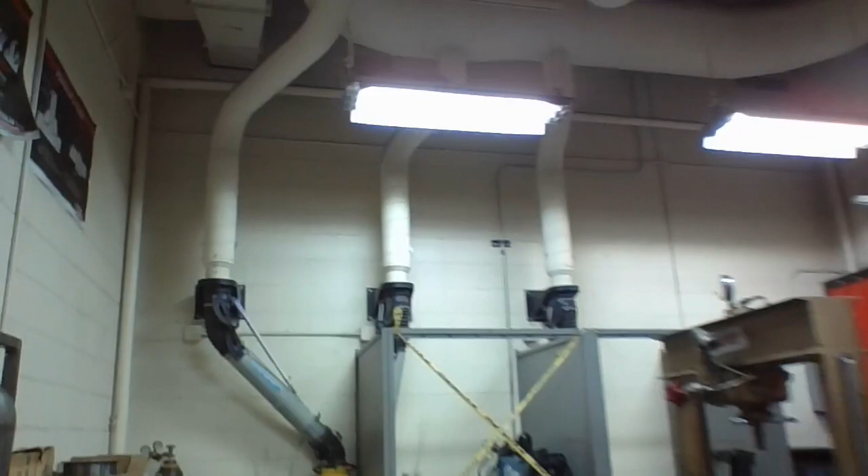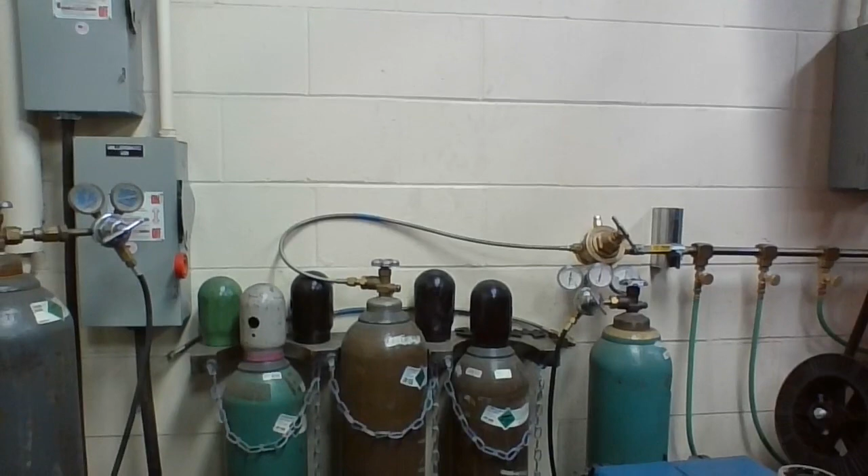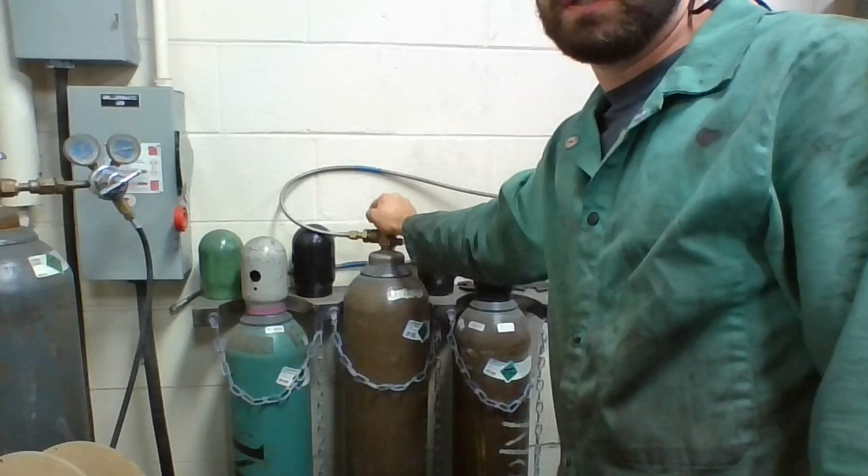So the typical gas pressure you want to use when MIG welding inside without any wind or anything is roughly between 15 and 20 CFH, so cubic feet per hour of flow of gas. To do that, I'm going to pick you guys up and flip you around in our welding shop here. If you walk into the shop and come over right in here, we have 3 tanks with a regulator on it right here. It's not a flow meter. This is a regulator. It regulates how much gas is going through there. So the best way to set this is slowly open the tank. Go ahead and open it all the way.

So what I find is the easiest way to set your gases is to come over to the machine here and turn on the machine. And then on the back side of our wire feeder suitcase, there's also an on-off switch, and I believe down turns the switch on, up turns it off. And then on the front of the machine right here, there's 2 little toggle switches. The one on the left is the trigger hold, so we're never going to use that one. But the one on the right is a wire feed. So if you push it up, if you see this right here, it's going to jog my wire out.

If I push it down, if you listen, it'll purge the gas into the system. So I think that's a good thing to do every time before you start welding for the first time for that day, because it purges all the air out of the system. And rather than getting porosity for the first inch, you'll have some 75-25 argon CO2, like what you want.

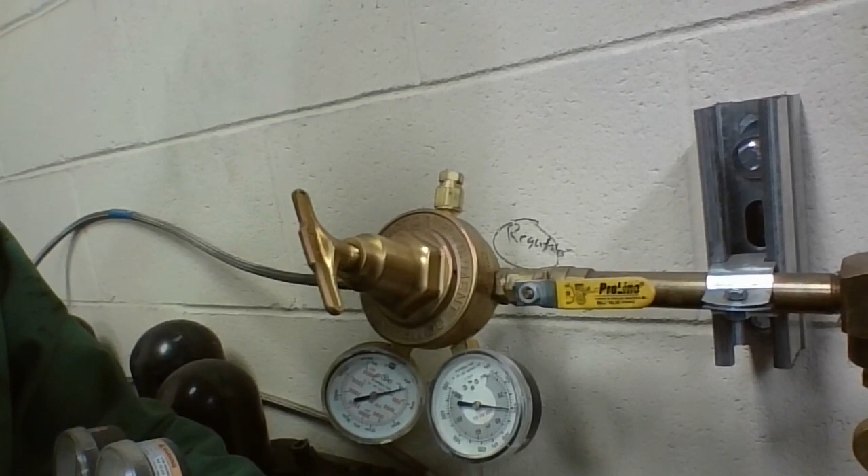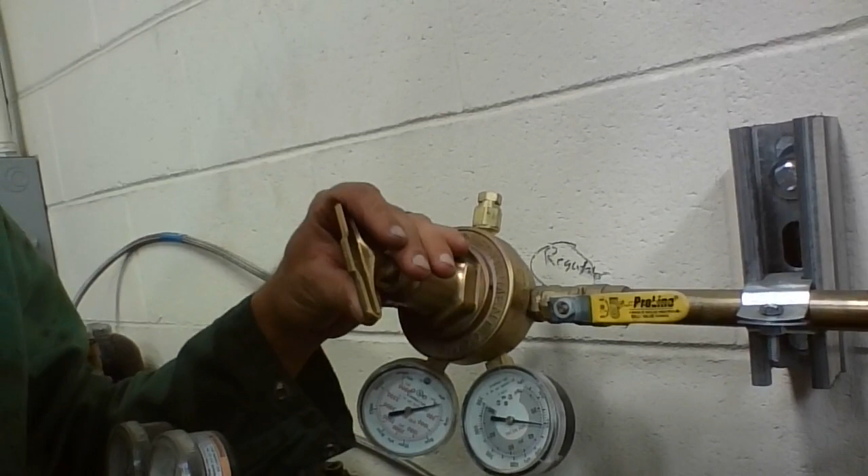So looking at the regulator on the wall here, right now I've cranked this up so it's at 200 psi, which is way, way too much for what we're doing. So I'm going to back out the T handle on here, and I would always check this at the beginning of the day. And where you want the pressure to be at is the second black line up. And to get this pressure to drop, I'm going to go back over to my welder. I'm going to push that purge button for a minute, let it purge the gas out of the system, and then I'll come back over here and double check it.

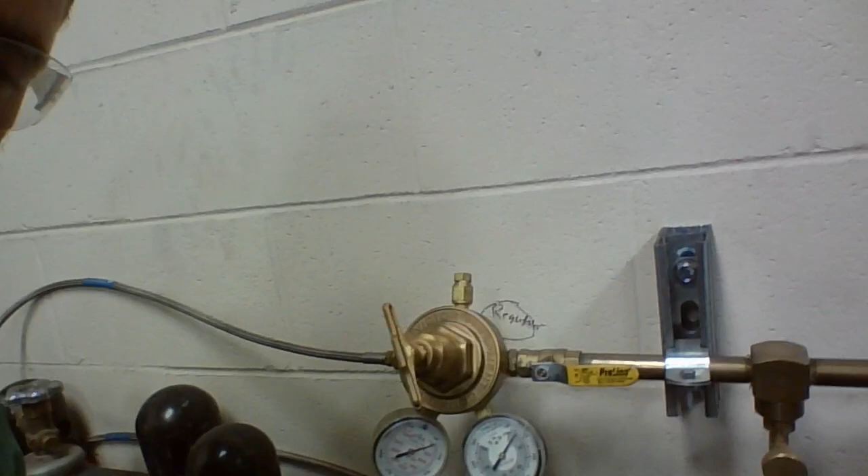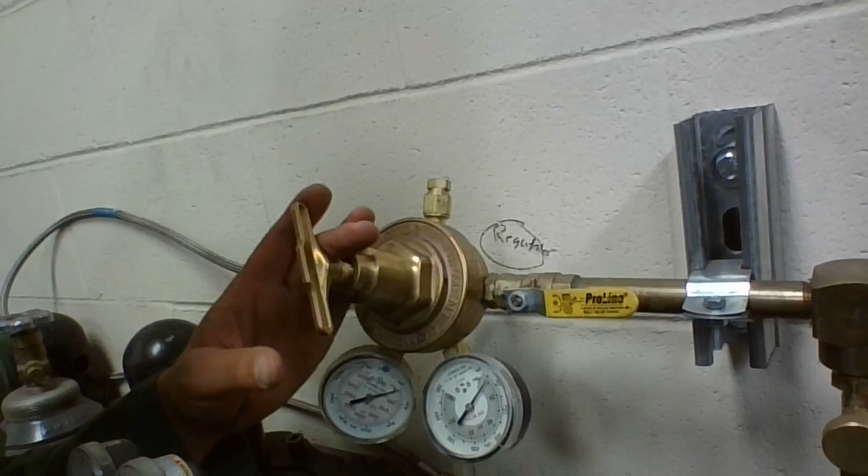Now with the purge button pressed, I have it adjusted to my second black line right here. And you want to push the purge button as you adjust this, because that's going to be your working pressure. So if you just adjust this, it's going to drop from there when you start actually using the gas.

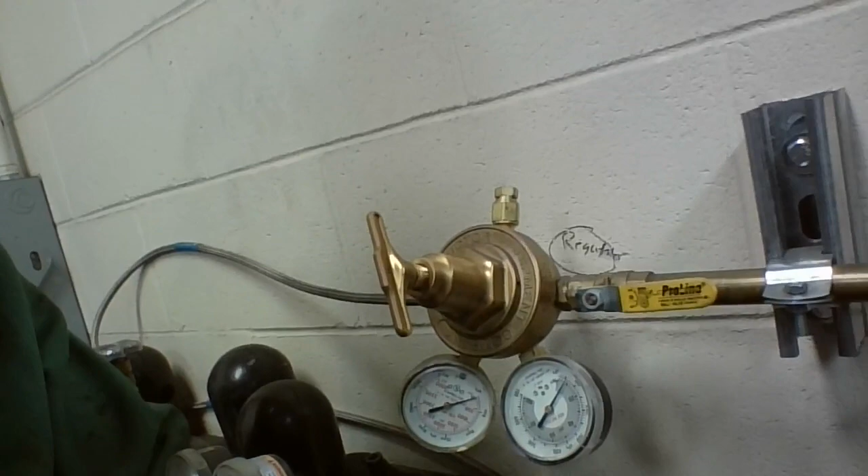So now that we have our gas set, we need to know what we can weld with the MIG welder. With the right setup, a MIG welder is a pretty flexible piece of equipment. The way ours are set up right now, you can weld steel, and that's it, mild steel. But you can buy a spool gun for your machine, and that allows you to weld aluminum. And you can also change out the wire on just a regular welder without the spool gun, and put stainless wire in there if you want to weld stainless steel.

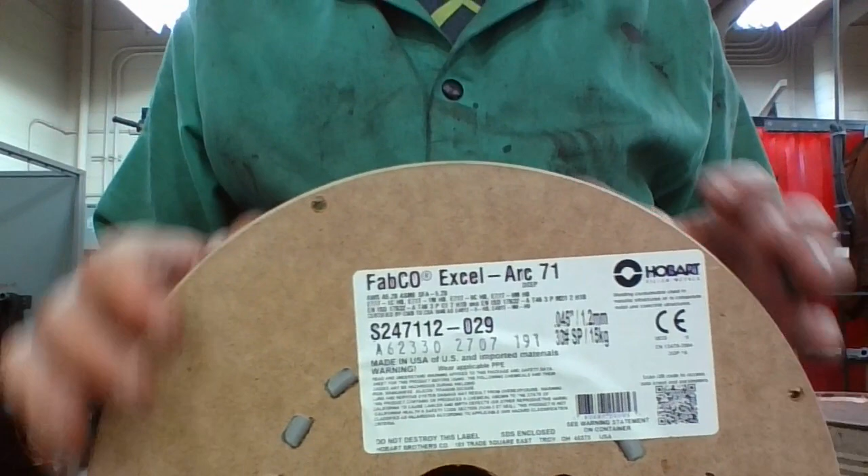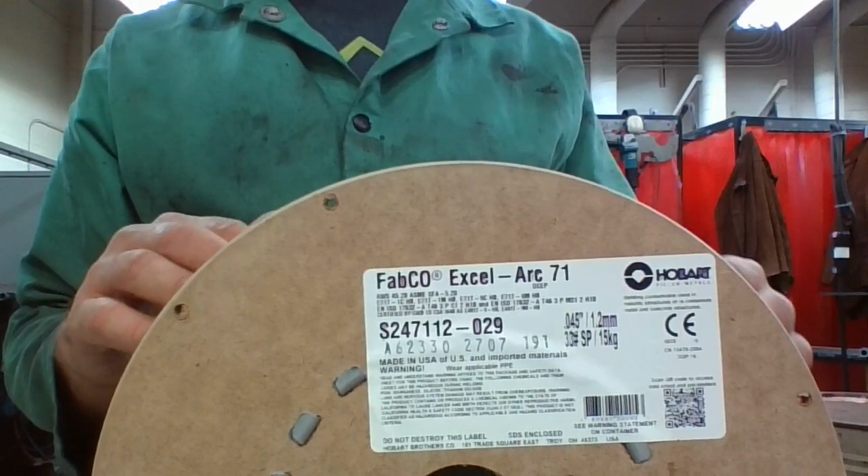As we're talking about steel wire that you can use on a MIG welder, there's 2 main different types that you can use. So I'm going to zoom you down here. The first one is called dual shield. If you look right here, that says 0.045. So that tells you the diameter of the wire. So typically dual shield is 0.045. And I also write on these 0.045 dual shield, so it's easy to tell.

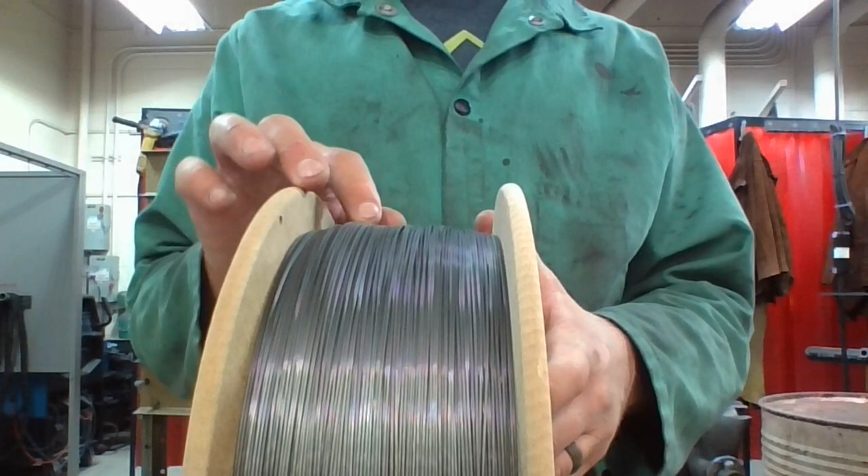And if you look at it this way, you see how silver that is? All dual shield will have a silver coating on it like that. And what dual shield is, it has a shielding gas on the inside of the wire, and when that burns, you're getting the shielding from that, and you're also getting the shielding from the C25, the 25% CO2, 75% argon that's shielding it as well. Whereas a regular MIG wire will have a copper color to it like this.

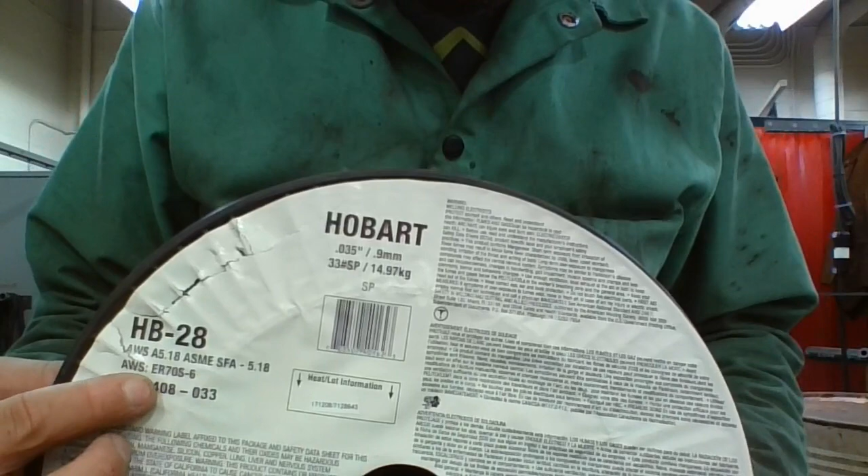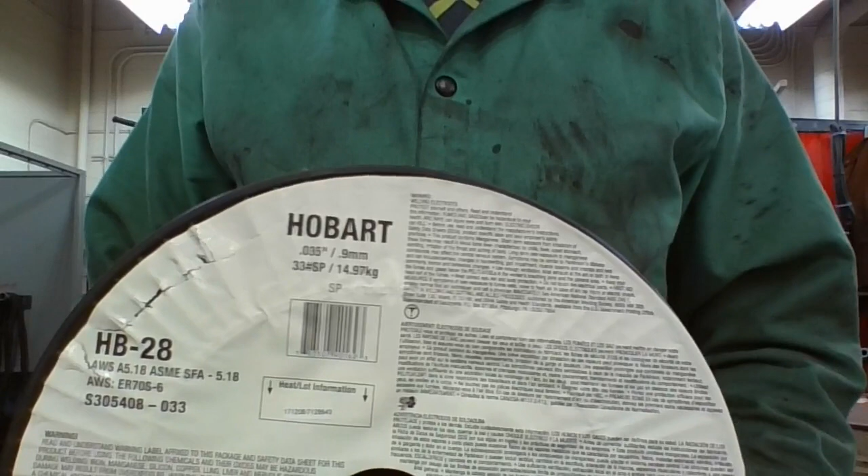And if you look at the label on here, it's going to say right here, ER70S-6. This is about the most common MIG wire you can find. It's also going to tell you the diameter of the wire right at the top here, 0.035. So this is 035 ER70S-6.

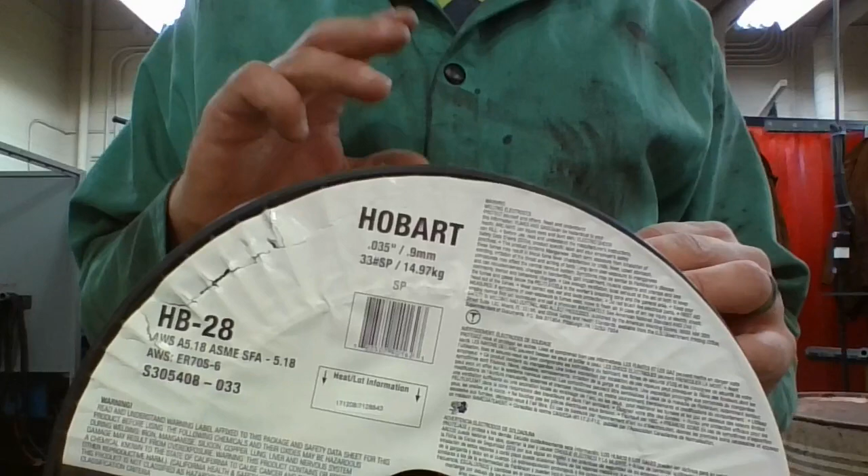And the three common ER70S-6 wires are 0.023 or 0.024, 0.030, and 0.035. 0.030 is a very common well-rounded wire that can be used from any thickness. So it'll go down to about sheet metal thickness, and it'll go up to about 5/16.

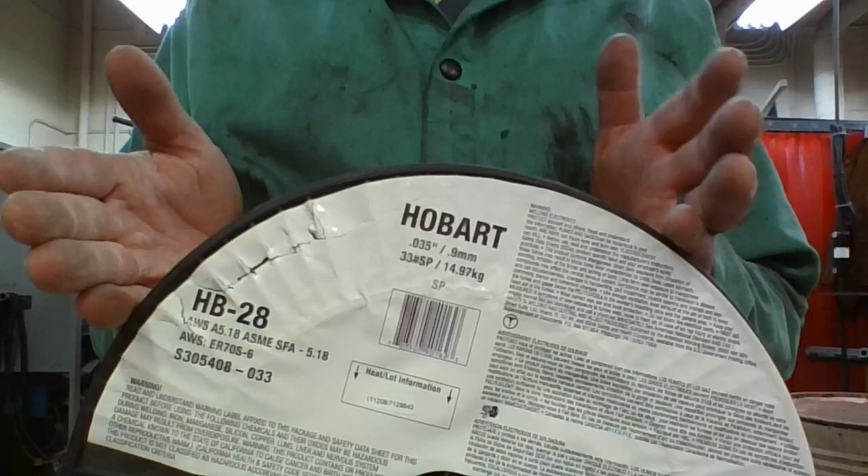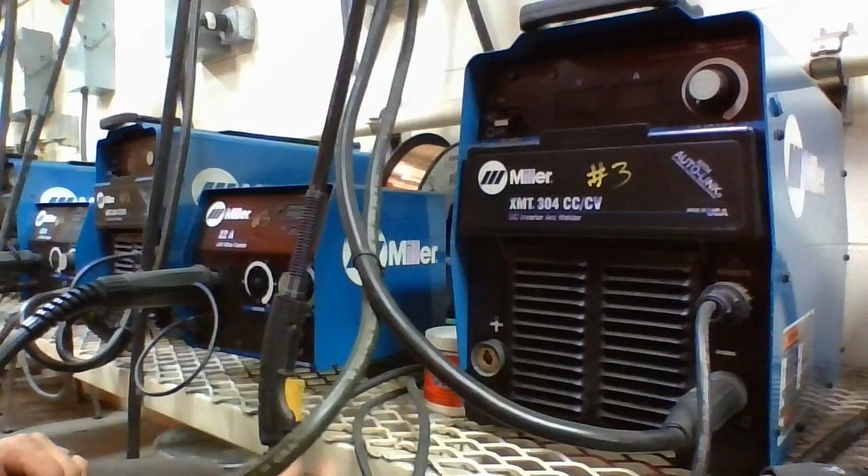Now we're back over at the machine here. And one thing we need to make sure is that our machine number matches our wire suitcase feed number. So both these are 3. The next thing we're going to do to set this machine up is we are going to take the electrode holder out of the positive, make sure our ground is in the negative position,

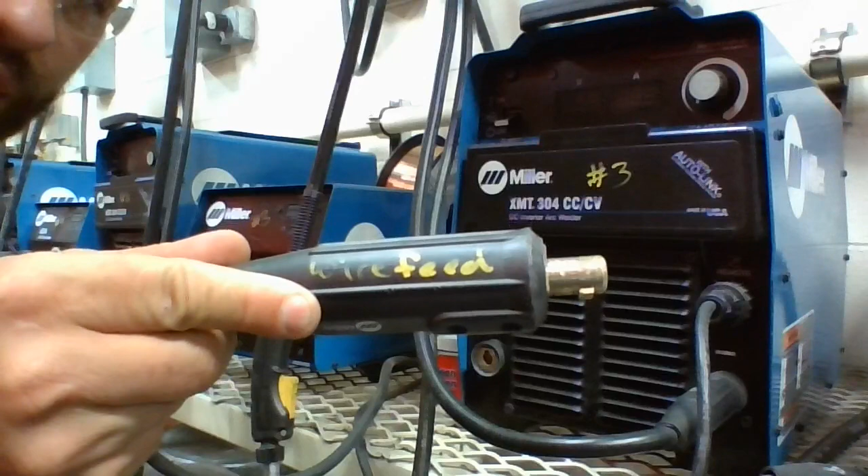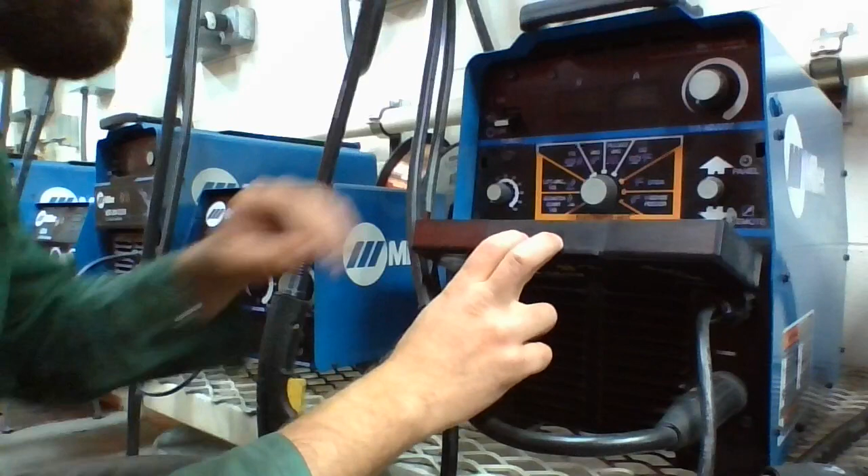and then right next to the machine here, there should be a Dinse plug that says wire feed on it. And make sure that wire feed goes to the suitcase that you think it does. You're just going to plug that in, twist it, get it nice and snug. We're going to flip the front cover open here. We're going to switch it from stick to MIG.

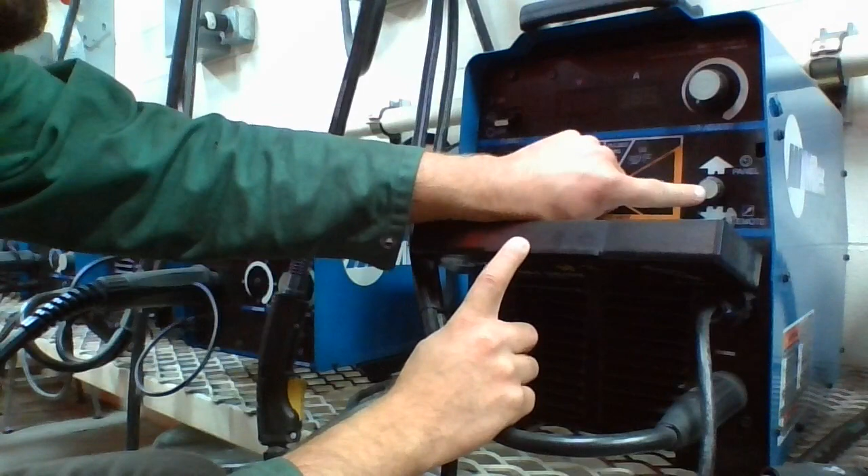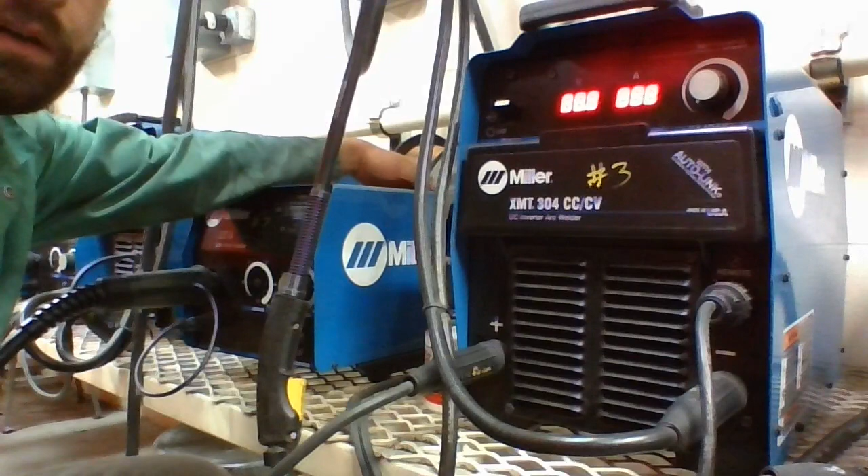Turn the arc control to 0. Turn the VA control up to panel. We'll go ahead and shut that. You can flip the machine on. On the back side of the suitcase here for your wire feeder, there's a switch. Flip that down. That turns the suitcase on. And then your gun, when you pull the trigger, it should feed wire and purge gas.

A couple last things that I like to do before I start is I like to unscrew my nozzle, and you'll see the nozzle and the tip will come out together. So if you take a pair of welding pliers, some people call these welding helpers, you can push on the tip. You might have to spin it around a little bit, see if you can get that out of there. So there, we got it out.

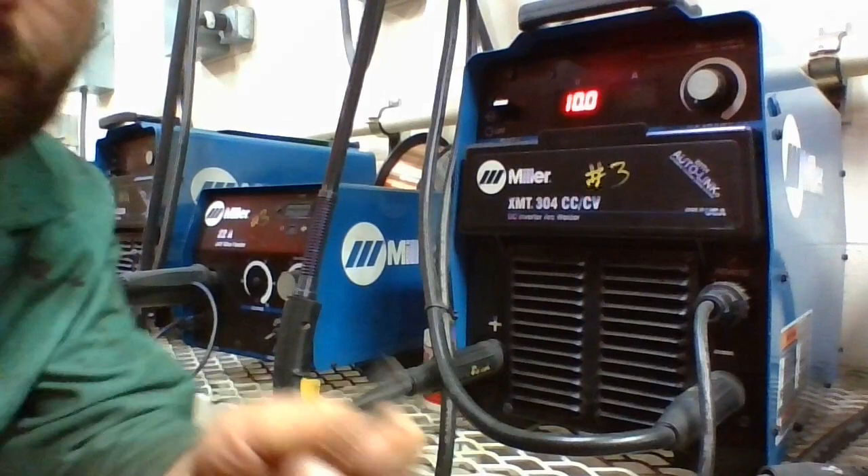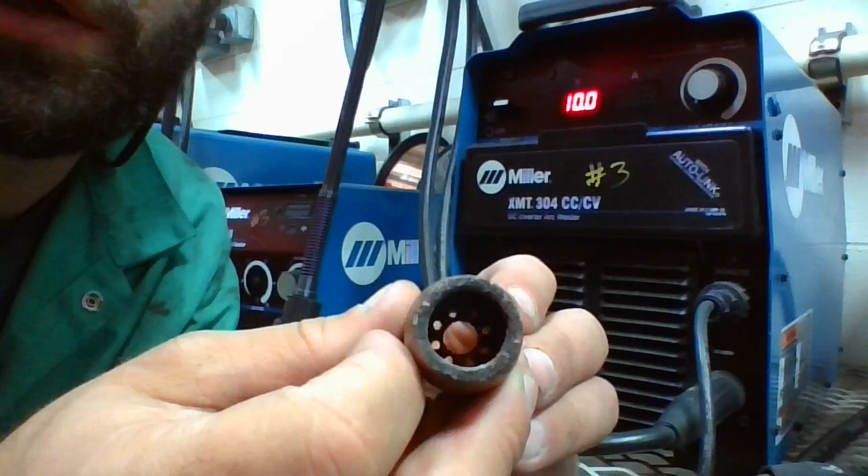This is what your tip looks like. And this one's pretty used up, so I'm going to grab a new tip. And then also the other thing I like to check is on my nozzle. You see all those holes in the back of there? You want all those holes to be clear, and you don't want any spatter inside of here.

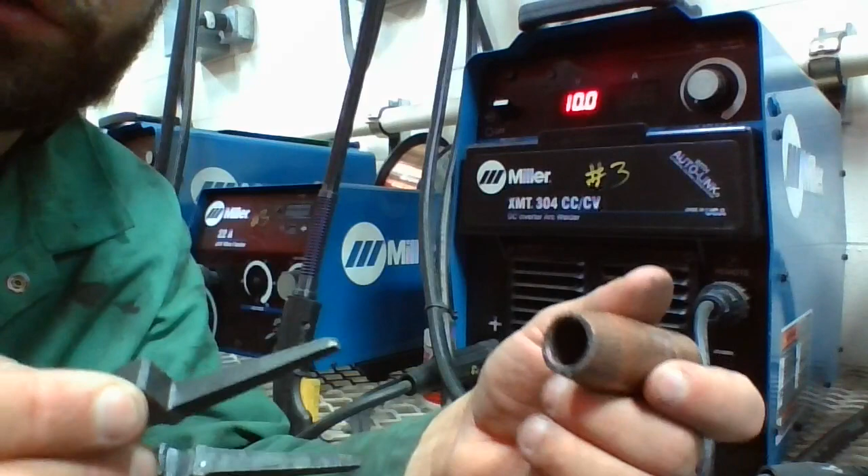If you have spatter, just take your welpers and put them inside the nozzle like that and give it a spin. I'll also sometimes close my welpers and then open them like that and spin it like that and get all that stuff out of there, because any debris in there is going to prevent the gas from flowing like it's supposed to.

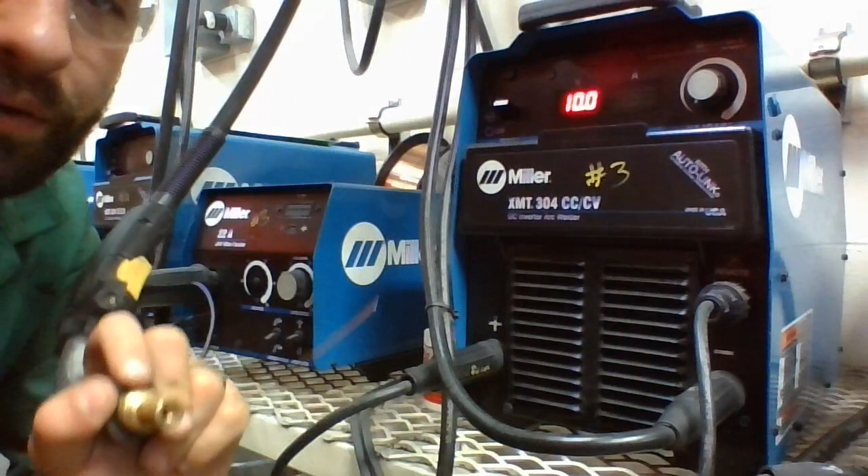Then once you're done, go ahead and install the nozzle and the tip back on the MIG gun. Be really, really careful not to cross thread the nozzle onto the gun. So here I have my brand new tip. All that I'm going to do is take my wire, slide the tip onto the wire like that until it comes all the way down.

And then when you put the nozzle on, you have to be careful that your wire doesn't go through one of those holes that we just cleaned out. Then you just thread it on. And that doesn't need to be super tight, just snug. And then we have all this extra wire coming out of our gun. And if you look at these welpers, on one side the wire cutters sit flush, and on the other side they kind of sit in a little bit.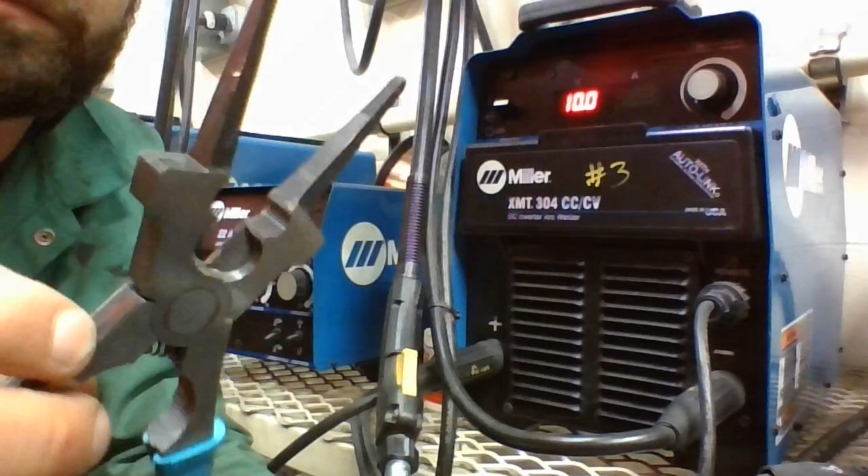So if you take this side of the pliers, set that down on your nozzle, just like that, and then cut your wire off. That'll set your wire stick out distance. That's the distance that you want to use.

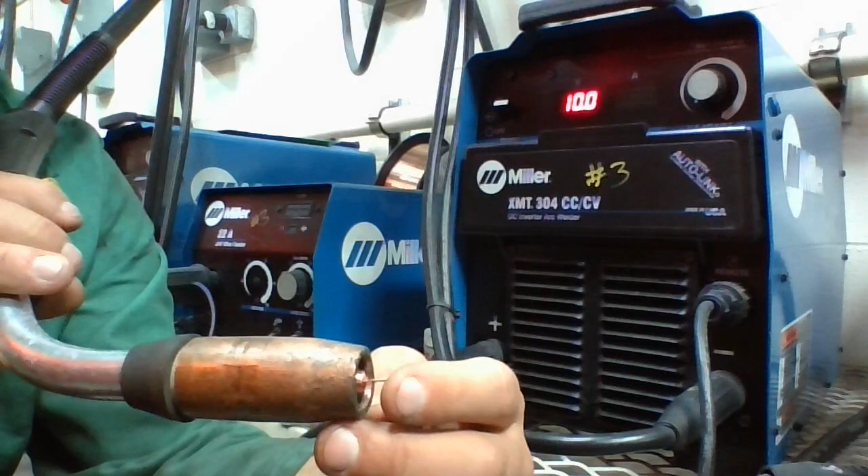Also, after you've been welding for a little bit, you let off the trigger, you're going to have a little ball that builds up on the end of this. You should take your welpers every time you let off the trigger and trim that wire. That'll make your arc start a lot easier and run a lot smoother for those first couple seconds where it'll usually kind of sputter.

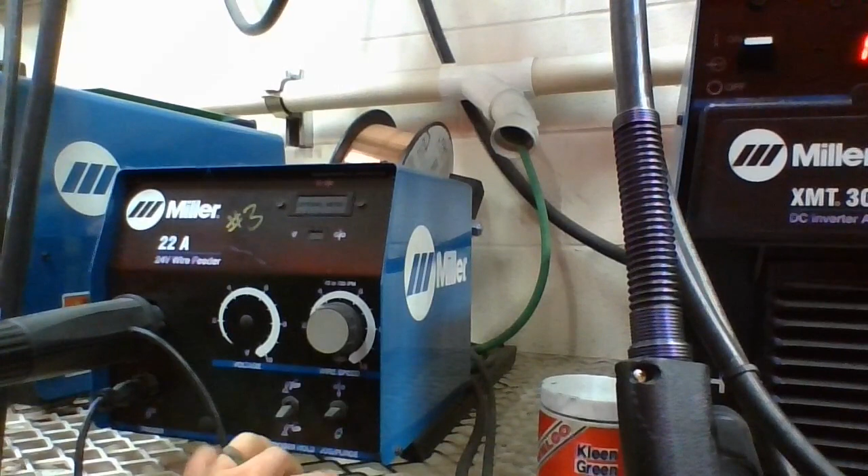Now that I have my tip cleaned and my nozzle cleaned out, what I'm going to do before I start welding is come over to the two switches on the front of the machine right here. This right switch says jog/purge. If I push the switch up, it'll jog the drive wheels and push some wire out. If I push it down, it'll purge. So I'm going to push this lever down for about 5 seconds. 1, 2, 3, 4, 5.

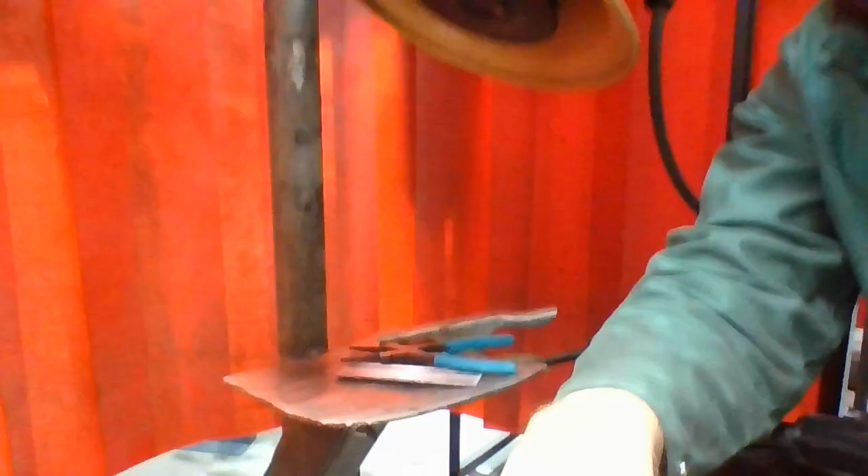What that does is purge all the gas from the atmosphere out of this line that may have got in there as it was just sitting, because the gas will naturally flow out. So we flipped ourselves around here. I have my ventilation over my head, just like we did when we were stick welding, because I don't want to breathe all the stuff that's coming off of this, all the gas and stuff.

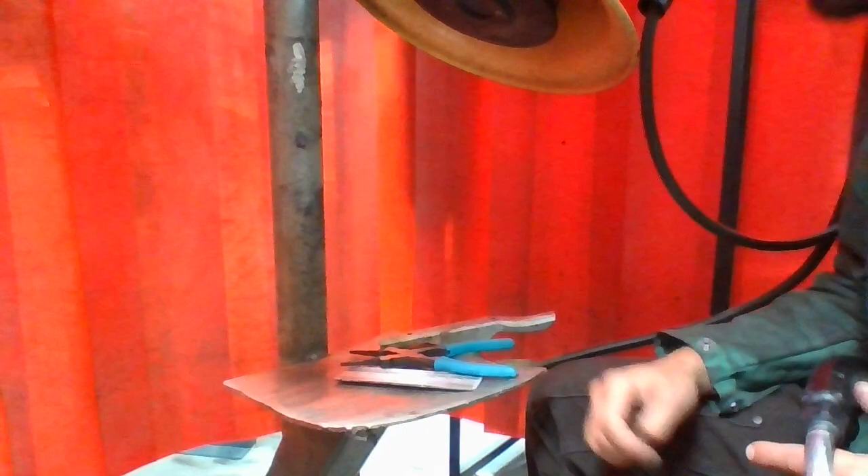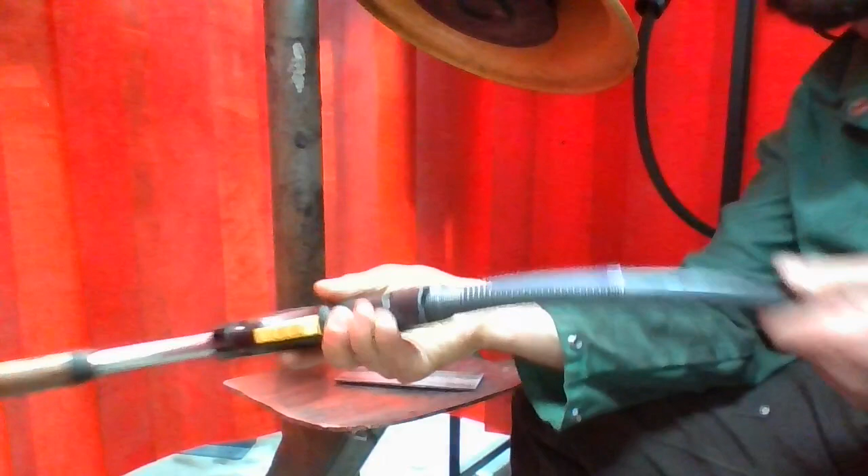One thing to keep in mind before you start welding: your MIG welder has a lead, and inside of this lead there's a liner. In order for the wire to flow out to the end of your MIG gun, this lead can't have any tight bends in it. So if you look behind yourself and your MIG lead has any tight bends, put a big loop in there rather than a small tight bend. That'll make it feed a lot smoother.

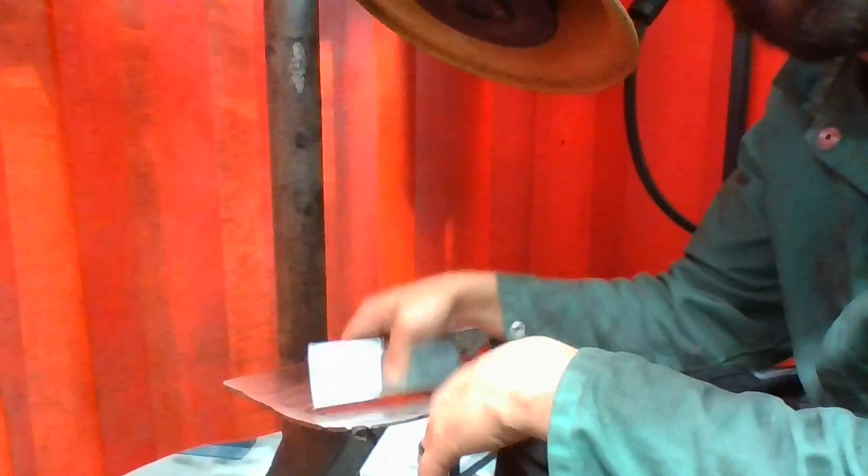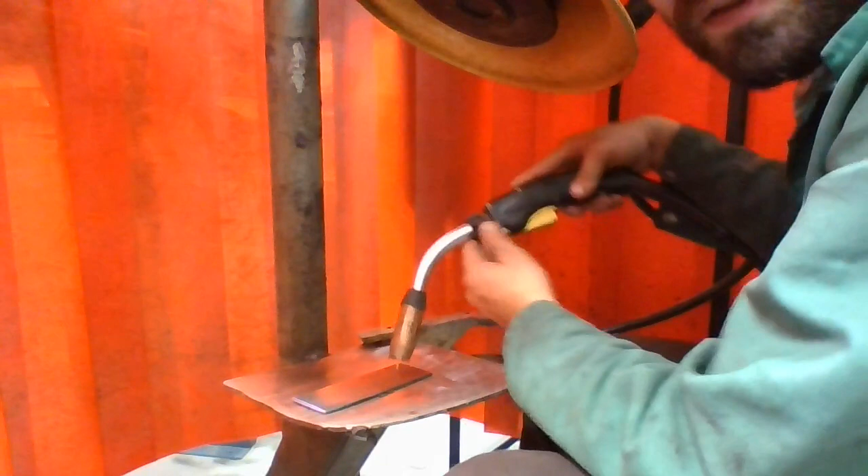I've got my material, it might be kind of hard to see, polished up nice and shiny bright. That way I'm not trying to weld through mill scale. I've got my ground clamp hooked up to my table, on the back so it's tucked out of the way. Now I've got to decide what welding motion I want to use and also what angle I want to weld at. When I'm welding flat, I try and keep my torch at 90 degrees side to side, and then I rock it back roughly about 30 degrees or so, and I keep that consistent as I'm moving.

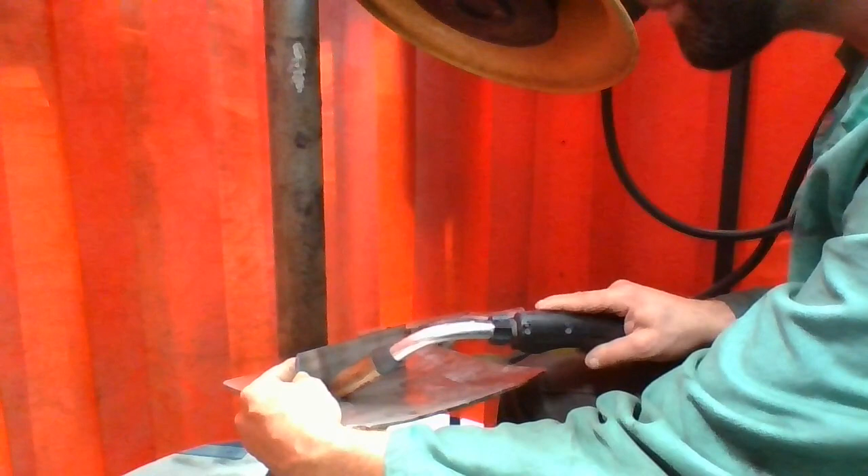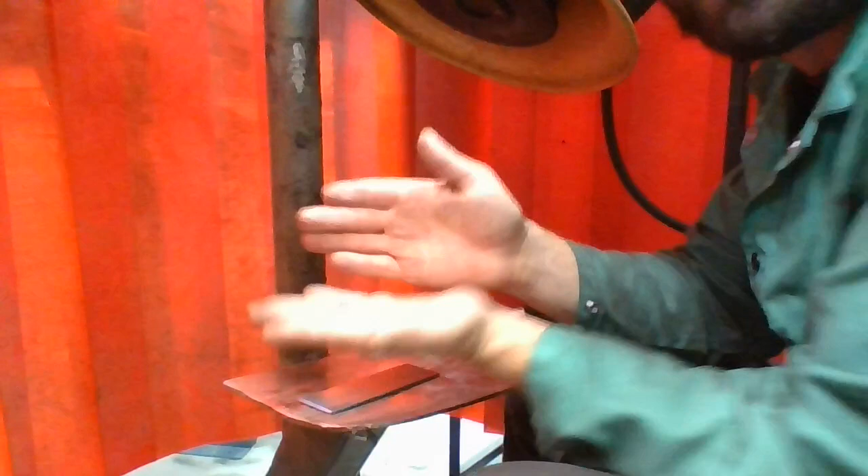That's going to change if I were doing this as a T-weld. I'm going to aim my gun straight into the corner of the joint with a 30-degree back angle. So typically, the rule of thumb when you're welding flat with two joints like this is to aim perfectly square into the corner with a 30-degree drag or push angle. If you're doing a lap weld, same thing. You're going to aim into the corner of the weld.

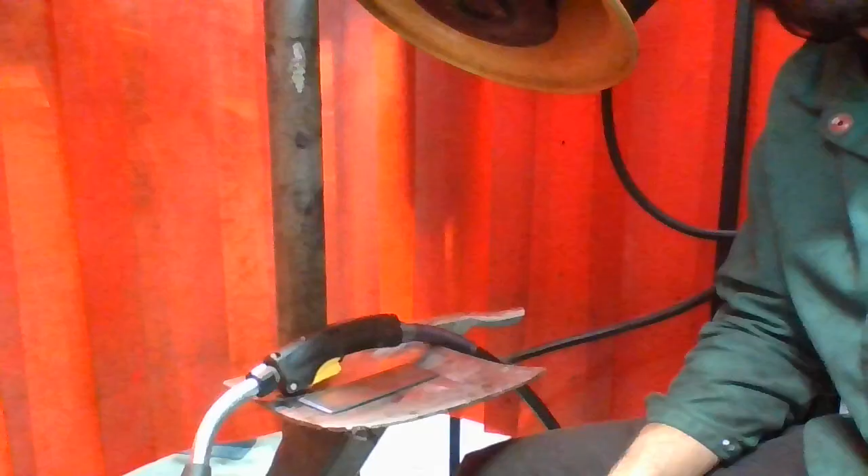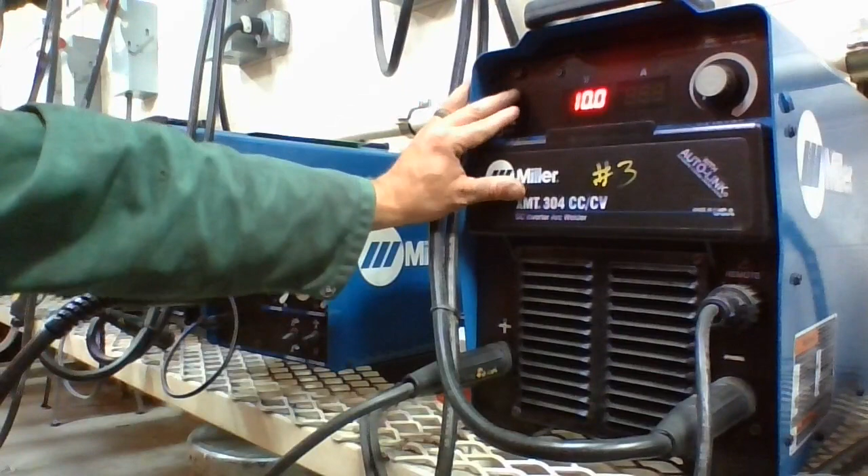I'm going to take you over to the whiteboard and draw some of the oscillations that work really well for MIG welding. But first, I'll show you how to shut everything down. When you're done with your machine, make sure to turn off the welder, and on the back side of the wire feeder, flip that switch up so the suitcase is turned off also. The last thing is to shut our gas off. We come to the cylinder attached to the braided line that goes to our regulator, and we shut that cylinder just like that.

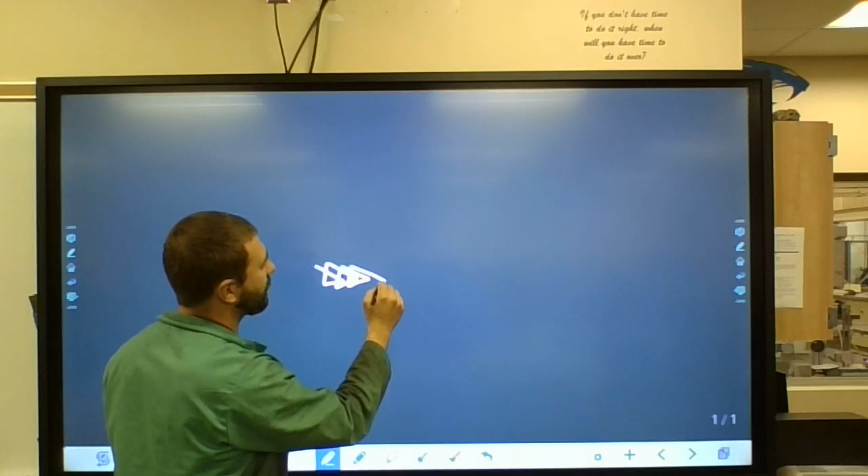There are basically three different types of manipulations for the MIG welder that work really well. You want to try and trace the front of the puddle. You never want to go out of the puddle, but the further forward you can get in the puddle, the better. That helps with penetration. The first manipulation is a series of triangles. As you go forward, that gets you to the front of the puddle. When you come back, that allows you to add more material. So that's the first one.

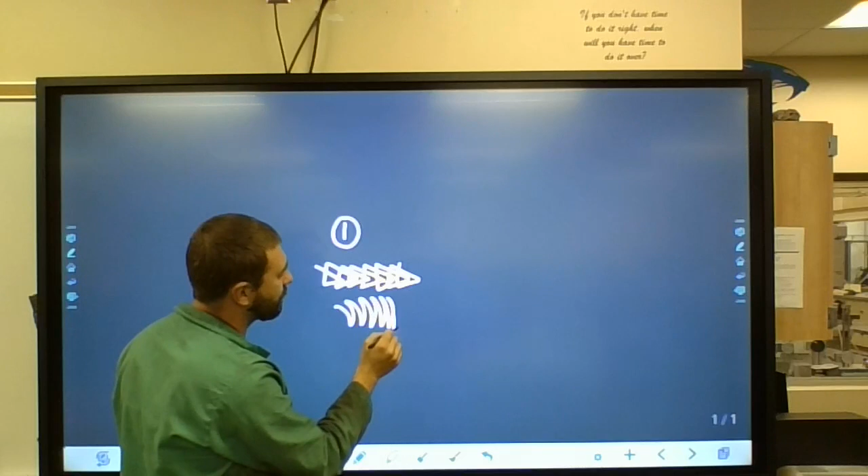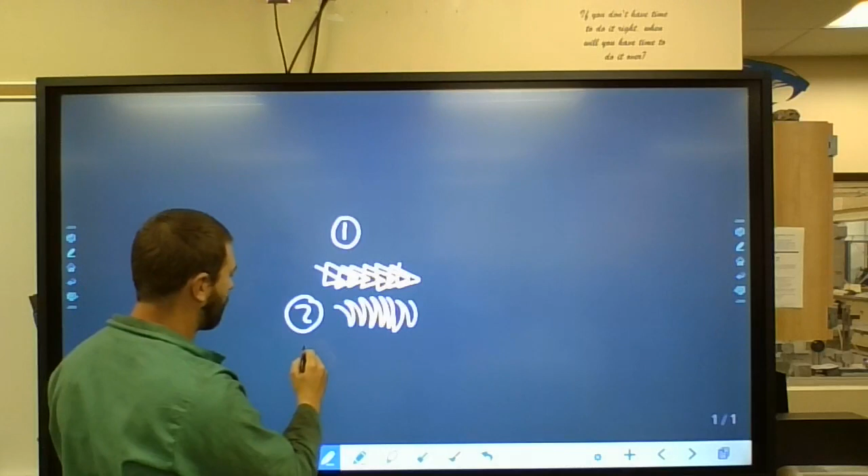The second one that works pretty well is a series of C's or half moons. It looks something like this. I'm pausing on the edges of the weld here. That's number 2. The third one is the one I use most often, a bunch of almost like cursive E's. So we have an E and another E.

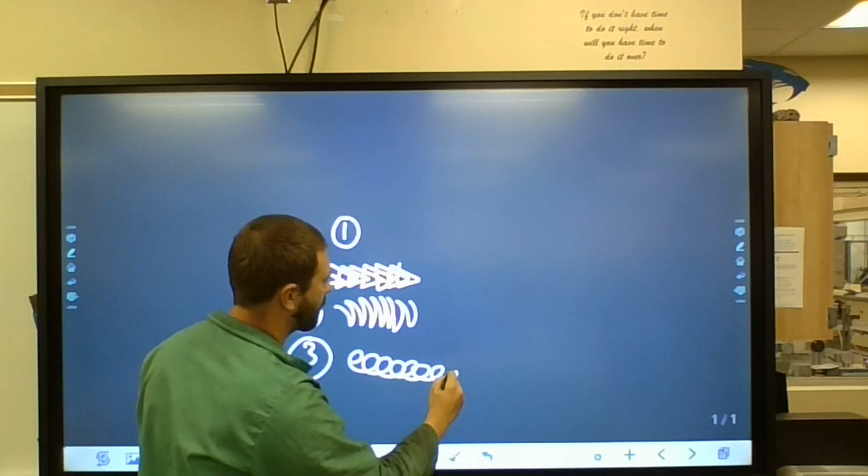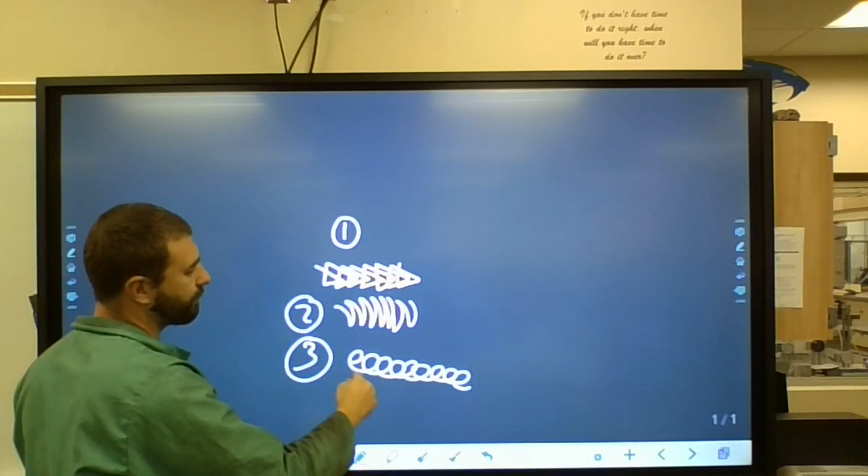I like that one the most because with some of these I feel like I get kind of jerky and not very steady, whereas that one is one fluid motion all the way down your plate. So experiment with all three of these and see what works best for you, because what works for me might not work very well for you.

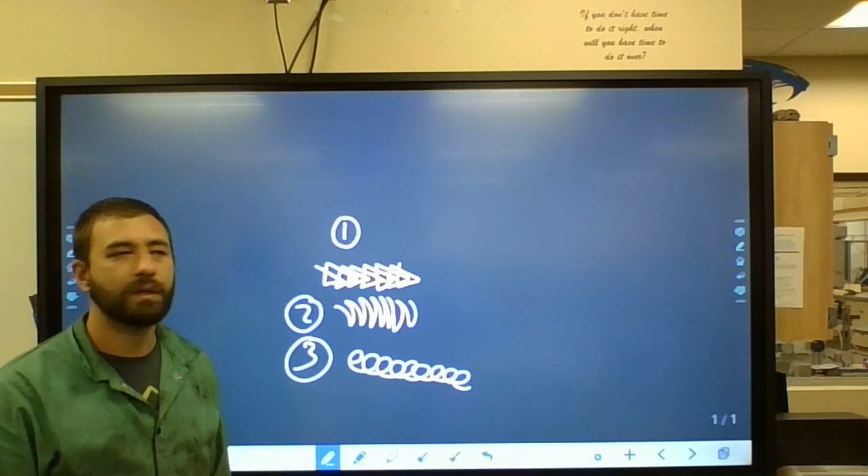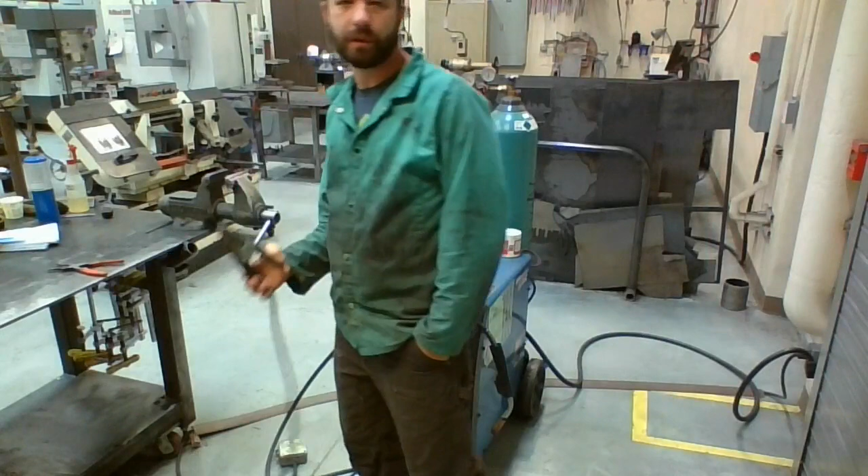The last thing I want to share with you guys is the floor model MIG welder that we have in the back of the shop. It looks similar but slightly different than the welders I was just demoing. So on here, we also have a ground clamp, and I like to hook that on the bottom of the table. I put a tab under there just to kind of tuck it out of the way for you.

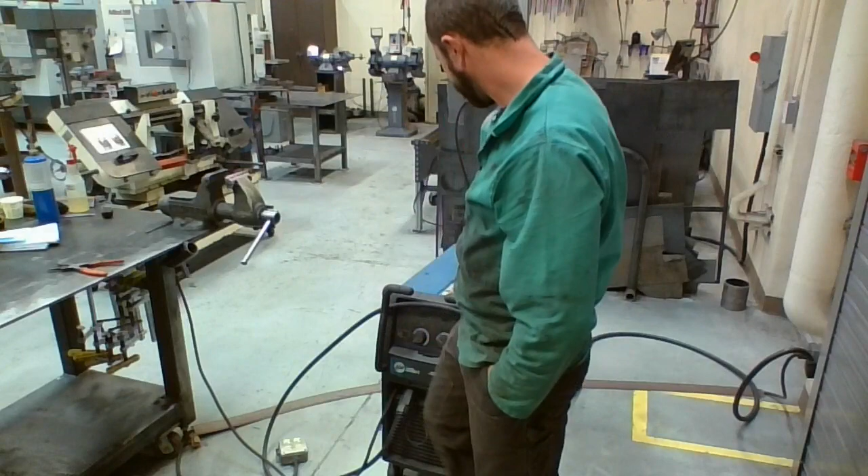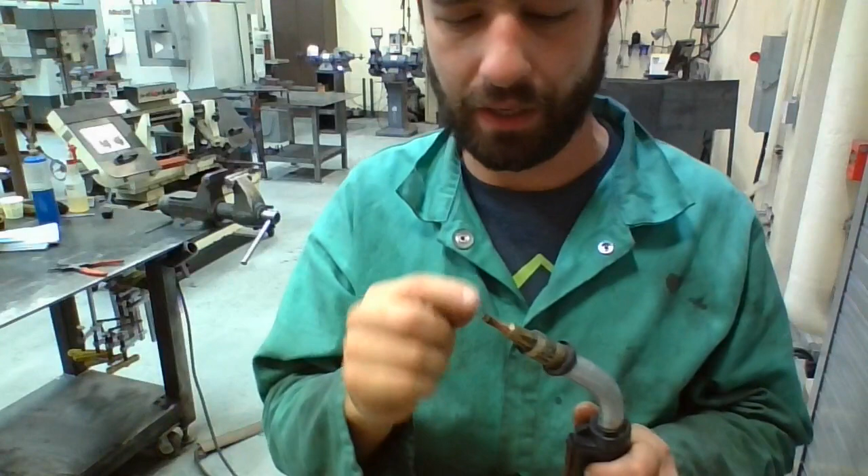It has a similar looking MIG gun, a little bit smaller than the Bernards that we have in the weld shop. This nozzle doesn't thread off. You can just pull it off, and it gets gummed up also. And then also these tips, rather than them just pulling off, they thread off. So you'll have to spin that to get the tip to come off.

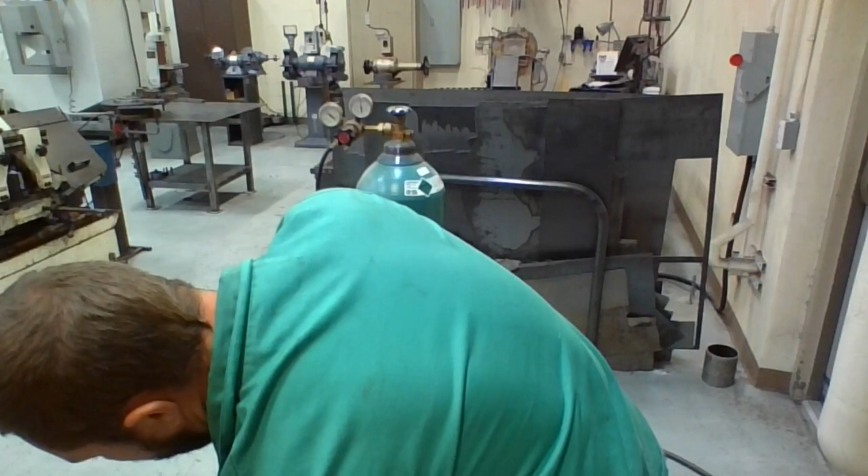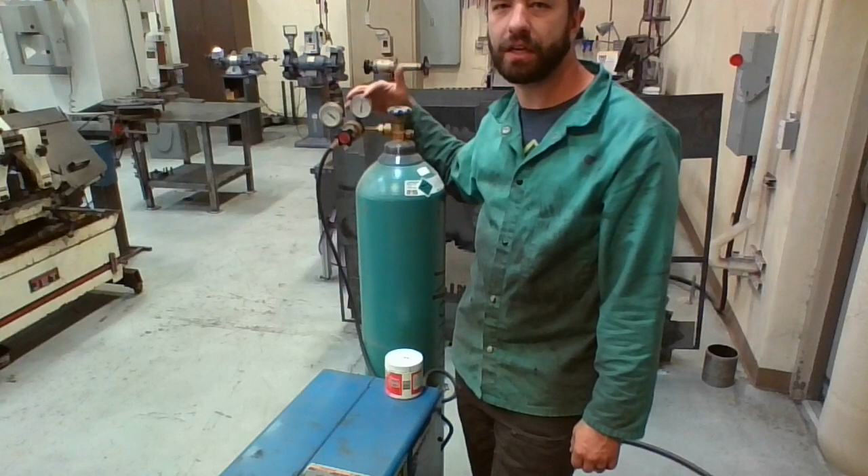To set the gas on this machine, all that you'll do is turn the power on the front of the machine. On the bottle, you're going to slowly crack the bottle open. And what you'll see is on this gauge, you'll have the tank pressure. The gauge that's closer to the tank is always your tank pressure. The gauge that's further away is your flow meter. So it's in cubic feet per hour. So it's 15 to 20 CFH is what we're looking for.

And to set that, all that you're going to do is pull the trigger on the gun, and then you can adjust it to 15 to 20 CFH. And then when you're done, make sure to shut the tank off, coil up your leads on here, just onto the front handle of the machine, and put it away.

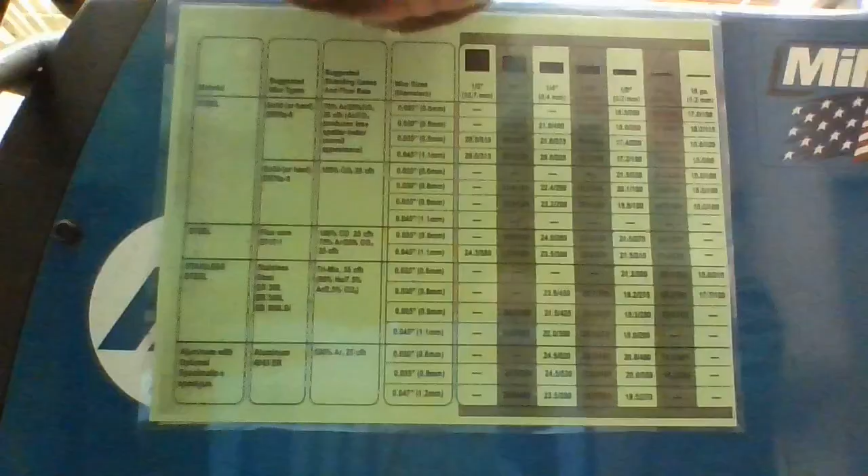As far as setting wire speed and also voltage, we have a chart on the side of this machine, and then on our welders in the welding shop, we have a chart on the top of the machine. And this chart isn't an end-all be-all chart. This just gives you a rough starting spot. So don't be afraid to adjust from where this chart tells you. So this reads from left to right and then top down.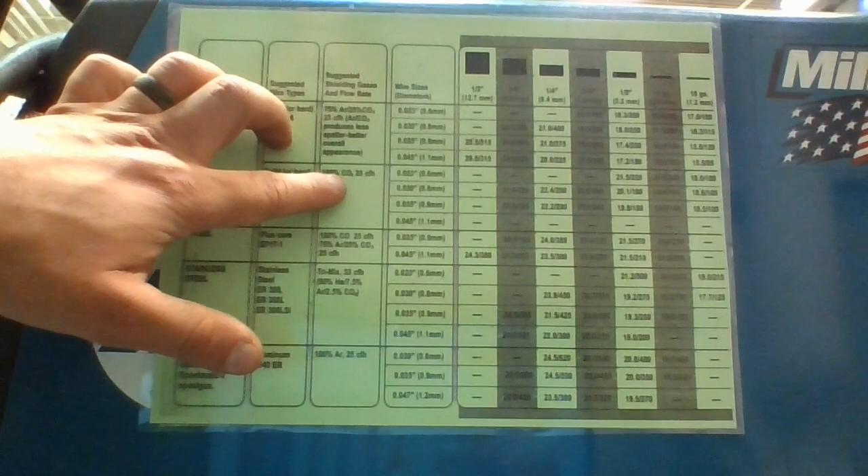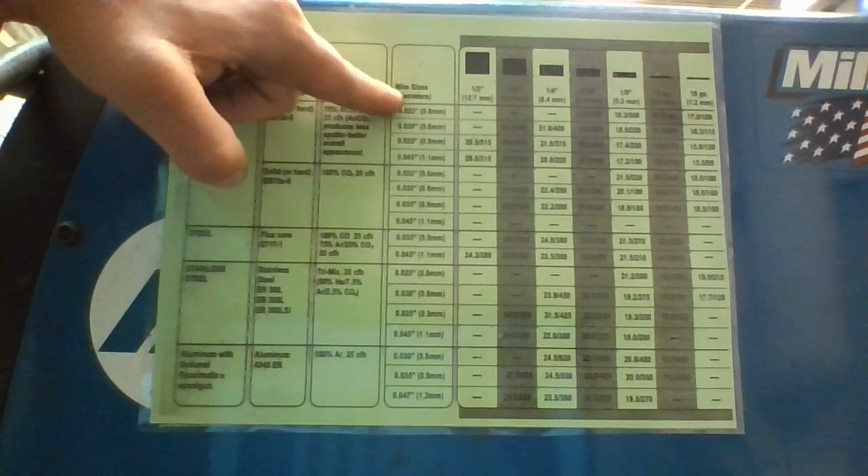So what material are you welding on? You're welding on steel, stainless, aluminum. So we're welding on steel, so that narrows it down to these two sections. So we're going to move over. So are we welding flux core, solid, and this is solid also. So we aren't welding flux core right now, and we are using ER70S6. So we're going to stick with those. We're going to go over again. We aren't using 100% CO2. We are using 75-25. So that narrows us down to this right here. We'll move over one more time. What's our wire diameter? We are using .035 on this machine.

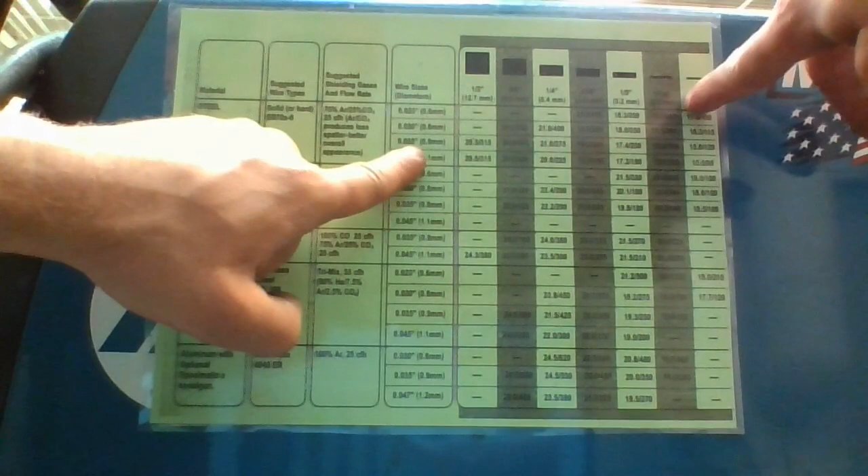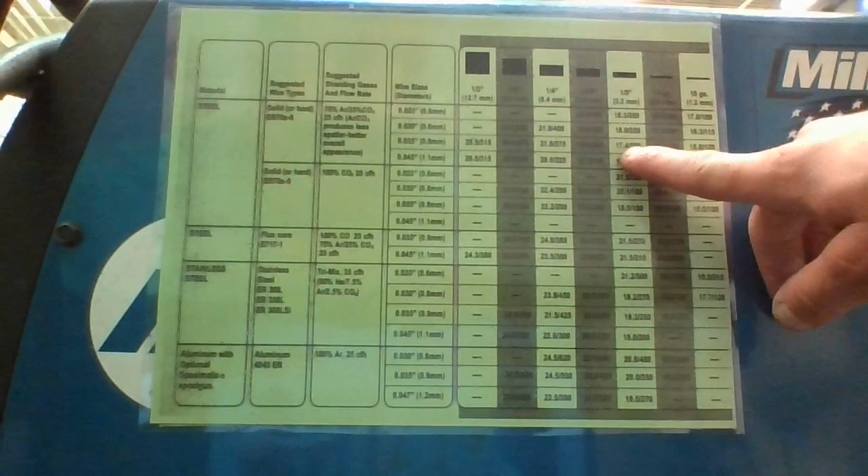And then the last thing you have to do is you have to look at your metal thickness at the top here, and then you're going to slide over and figure out where these meet. So I'm welding 1/8" material today. So it says I need to set my machine to 17.4 on my voltage and then 230 on the wire speed. And that seems to be a relatively good setting. You'll have to adjust it some.

Another great way to set the machine, if you're getting a lot of crackling, it's not sounding quite like you want, a bunch of splatter, is you can weld, get your machine running. You could say set it to 17 volts or 17.5 volts. Because I know the wire speed's a little bit trickier to set on the machines in the welding shop, you just set your voltage and then start welding and have your buddy start turning up the wire speed.

And then once it starts to sound good and crisp, have them pay attention to where that is and keep turning it, and it'll start to sound poppy again. And then you can turn it back to where it sounded crisp and really smooth, kind of like bacon frying. That's the sound that you're looking for.

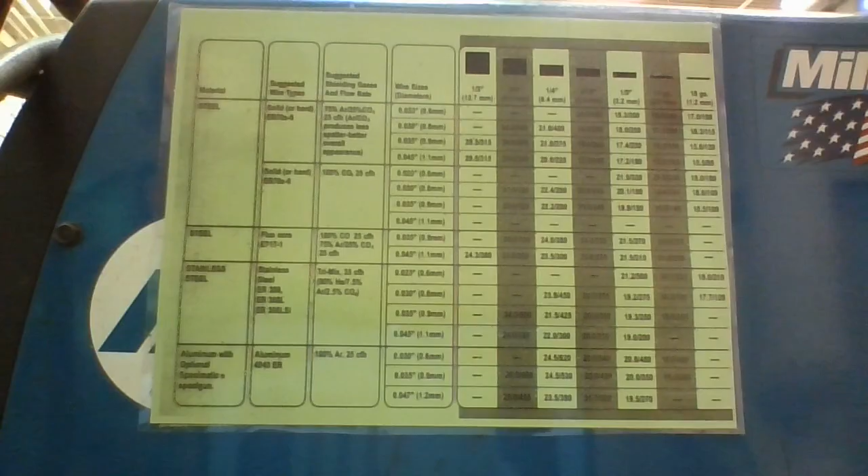Also, as you're MIG welding, you're going to find that your nozzle gets clogged up. It's going to get lots of splatter in there. We do have some Weldco clean gel, or clean green is what they're calling it, nozzle dip weld splatter preventer. And the way this works is you have to run a pretty good bead, run a 6-inch bead, get that nozzle nice and hot, and then you're just going to take the top off and dunk it in the nozzle gel just real quick. It only has to go in about a 1/2 inch or maybe 3/4 of an inch, not very far, and that'll coat the nozzle to help prevent the buildup of that splatter.

We also have anti-splatter spray. So if you're going to weld in an area you don't want the splatter to build up, you want it to come off really easy, you can put this anti-splatter spray on, do your weld, and then all your splatter in theory should just wipe off really super easy.